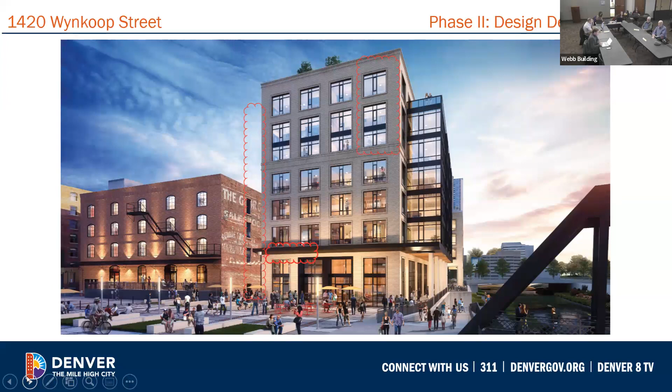So the applicant will be removing parking level number 3 and will be maintaining the parking levels at 1 and 2. Additionally, the applicant is proposing to increase the step back from Wynkoop at the northwest corner. It was previously 15 feet 6 inches and is going to be increased to 28 feet 8 inches. That area is highlighted with the red box. Staff was supportive of this as they felt that it added additional visual relief to 1430 Wynkoop, which is that contributing structure.

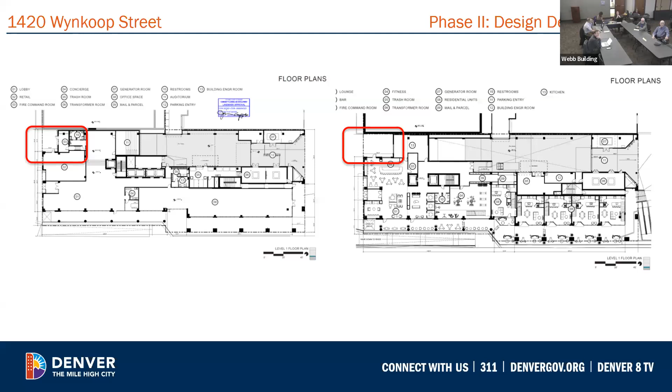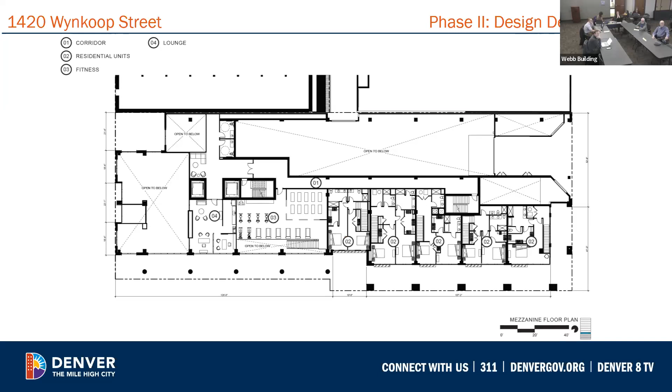So the applicant is proposing to add a mezzanine level between levels 1 and 3, and that will increase the overall number of stories from 8 stories to 9 stories in the previous approval. Beginning at level 3, continuing to level 5, the applicant will be stepping the building back from Wynkoop Street on the northwest corner from 28 feet 8 inches to 51 feet 10 inches. The applicant will inset the north wall of the new structure away from the south wall of 1430 Wynkoop Street 5 feet 2 inches for a length of 36 feet 5 inches.

So this portion right here: the applicant will be increasing the inset on the north wall an additional 5 feet, for a length of 140 feet 9 inches, before stepping back out to a width of 9 feet 11 inches at the northeast corner.

Staff would like to note that the patios shown on the 5th floor of the previous approved plan set have been moved to the 3rd floor.

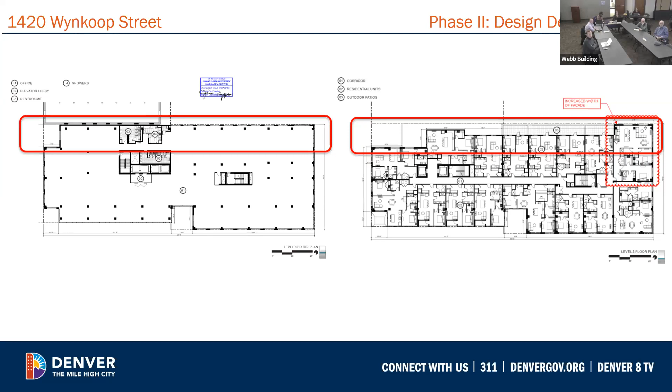Starting at level 6 and continuing to level 5, the applicant will be maintaining the 51 feet 10 inch step back at the northwest corner and the 5 foot 2 inch inset for a length of 36 feet 5 inches on the north wall of the building.

They will be increasing the 10 foot 2 inch step back on the north wall for a length of 140 feet 9 inches, increasing to 177 feet 9 inches at this floor. The 9 foot 11 bump out on the northeast corner of the building will terminate at level 6.

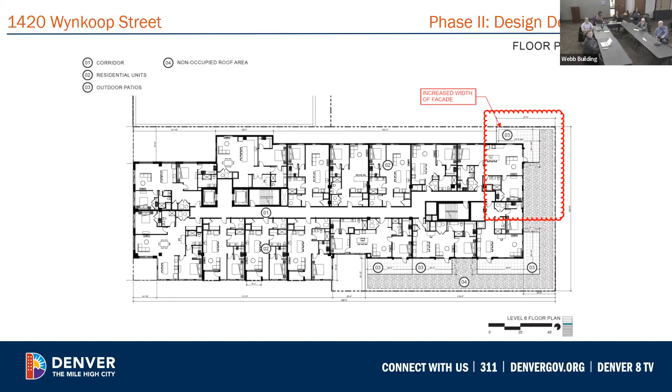Finally, as far as alterations to the footprint go, the applicant is proposing to alter the penthouse portion of the building. In the previous approval, that's level 8, and in the proposed plan set, that's level 9. The west Wynkoop facing wall of the penthouse will be set back from the front wall of the building 26 feet 4 1/4 inches.

The south Cherry Creek facing wall of the penthouse will be set back 15 feet 4 inches, and that will increase to between 15 feet 4 inches and 16 feet 6 inches, measured from the south wall of the building.

The east Wazee facing wall of the penthouse will be set back from the east wall of the building 32 feet 7 7/8 inches.

The north, 1430 Wynkoop Street facing wall of the penthouse will be set back from the north wall of the building 9 feet 2 inches, and between 9 feet 2 inches to 25 feet 6 inches.

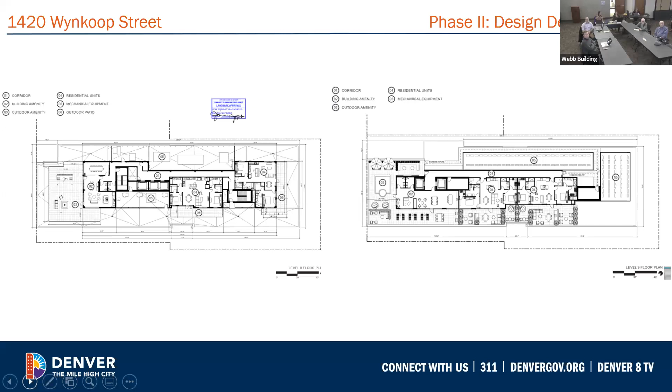The roof deck of the building will wrap the north, west, and south sides of the penthouse, with mechanical equipment on the north and east sides of the penthouse. That will be set back 88 feet from the west Wynkoop wall of the building.

Now we'll move into alterations on elevations. There are just a few minor adjustments to the approved windows at the first floor of the south elevation, added to better accommodate the mezzanine level in the proposed plan set. They will also be adding additional doors at level 1 to provide patio access for the first floor tenants.

The largest change on the south elevation is the addition of Juliet balconies and doors and additional recessed balconies. The applicant will be adding clear glass Juliet balconies and doors to levels 3 through 8 of the southwest corner of the building, and levels 3 through 5 of the southeast corner of the building.

They will be maintaining the overall mullion pattern of these openings from the previous approval, but will be adding doors and clear glass railings instead of just maintaining them as windows.

They are also proposing to add recessed balconies on levels 4 through 7 of the southwest corner of the building, compared to the previous approval of recessed balconies that were just at levels 5 through 6 on that corner.

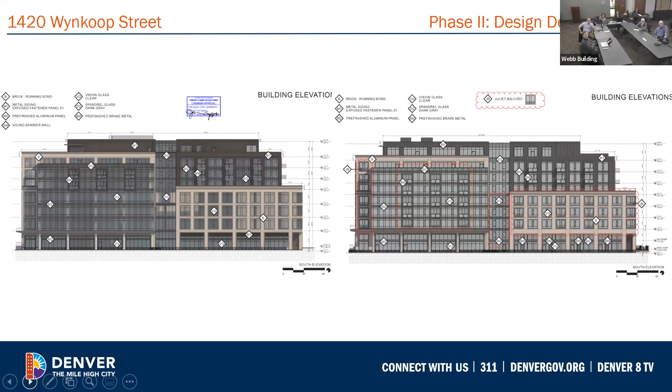So on the east elevation, there are 2 changes proposed. That includes the addition of casement windows on levels 3 through 5, and the addition of Juliet balconies and doors on levels 3 through 5.

The proposed casement window addition will fit within the approved mullion pattern in the previous approval, and will not significantly alter the appearance of the previous approval. The applicant will be adding clear glass Juliet balconies to levels 3 through 5 of the northeast corner of the building, maintaining that overall mullion pattern. They're just adding operable doors and a railing rather than maintaining windows.

So the addition of Juliet balconies and doors to a street-facing facade below 55 feet is slightly concerning to staff. However, this portion of the guidelines is a preference and not a requirement, so we felt some flexibility could be granted here.

I don't know why it decided to stop letting me change the slides.

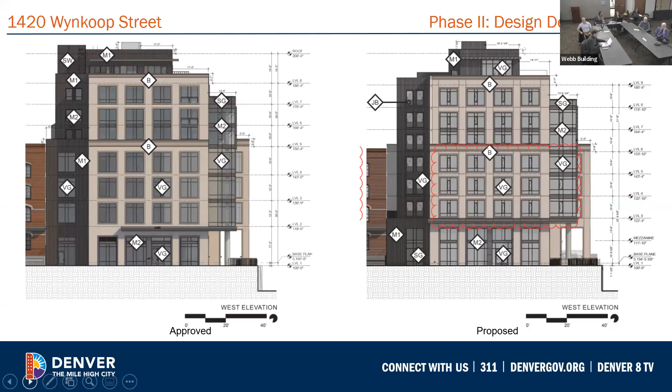So on the west elevation, the applicant is proposing 3 alterations: the addition of casement windows on levels 3 through 8, the addition of Juliet balconies on the metal clad building zipper on levels 3 through 8, and the removal of the first floor entry door on the metal zipper portion of the building.

The casement window addition will fit within the approved mullion pattern and will not significantly alter the appearance of the previous approval. The applicant will be adding clear glass Juliet balconies on levels 3 through 8 on the northwest corner of the building, maintaining that overall mullion pattern as previously stated.

Further back on the building, the Juliet balconies and doors will be added to the setback, which is set back from the street 51 feet 10 inches. Finally, the applicant will be removing the entry door at the first floor of the building on that zipper piece, maintaining the overall mullion pattern from the previous approval, just adding a door at that first floor level.

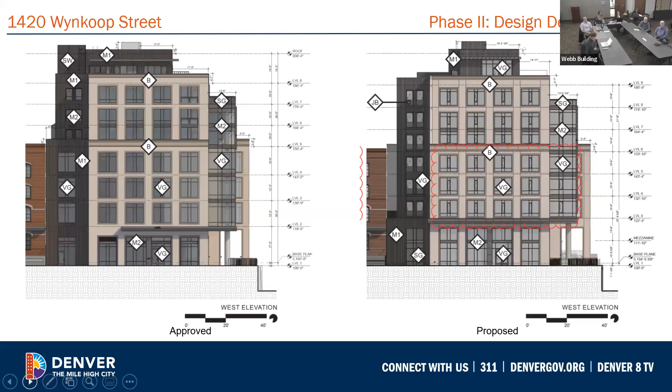On the north elevation, there will be quite a few alterations. The applicant will be stepping back the metal clad building zipper from 28 feet 8 inches to 51 feet 10 inches, adding clear glass Juliet balconies to levels 3 through 8 on the northwest corner of the building, as well as levels 4 through 8 on the main body of the north elevation. The applicant will be maintaining the overall mullion pattern of these openings from the previous approval, and adding clear glass balconies.

The applicant is proposing 3 windows matching the previously approved window configuration on the 36 foot 5-inch bump out. Staff had mild concerns over the solid to void spacing on the bump out, but feel it may be minimally visible as it is more than 51 feet 10 inches from the west wall or west elevation, and it's on an interior side.

An additional alteration to the window openings can be found on the metal panel zipper at the center of the north elevation. Previously, the windows in this location were paired awning and fixed mullioned windows, and now they're proposed to be altered into single punched openings. We had some concerns over this additional window type on this elevation, feeling it might visually disrupt the established window opening rhythms on the building, but also felt this portion of the building would be minimally visible because it is at that interior lot side.

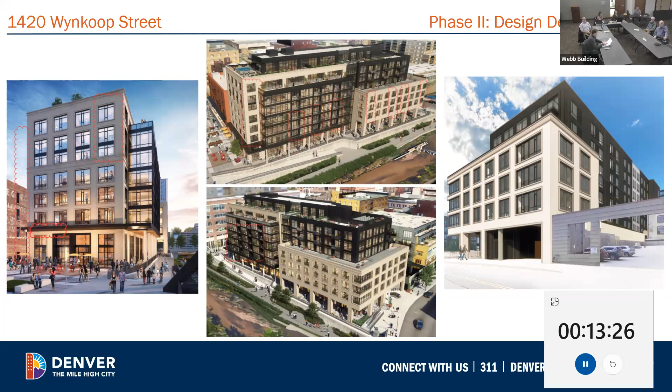I think, as is the theme relative to the original design detail approval, we think this is actually a better response and condition at the corner than was initially approved. We hope you see that just by having that sort of interlock and that element, the masonry element, sort of fly past the upper story setback area.

And we do believe, I believe it was Heather, maybe the last time we spoke, who thought that the plan would benefit by introducing some extra square footage to that unit itself. And I believe, as Mr. Glick commented, the datum at 55 feet is important.

We've gone in and done albeit subtle, but intentional detail to highlight that area throughout the solid metal zone on that north facade, and then changed how the windows are gathered through material texture and pattern on the floors below that datum. So it's more subliminal than literal, of course, not an obvious color change. We thought that was incongruent with the overall composition and would detract from the alley, but we do have a material change, or a pattern change, there.

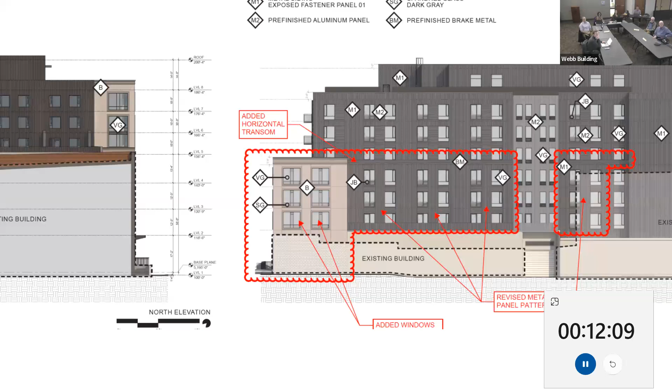So we tried to consider and respond to all the comments we got last month, and hopefully you're seeing that here today. Is that all you have? That's it. Great. Any members of the commission have questions for the applicant?

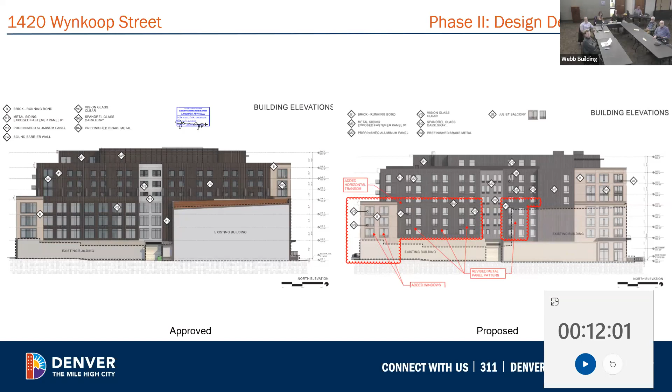Is there anybody from the public wishing to speak on this project? If you were on the Zoom, please raise your hand. The staff can make you a presenter. No hands raised. Okay, we're not seeing any, so we will close the presentations and public comment and open deliberation.

What does everybody think? I wasn't part of the last round review piece, so I don't have that context, but I'm supportive of the changes. Given the primary shift to fully residential and the pattern of windows, the Juliet balconies at low levels, I don't have an issue personally. I think it's a good street activating moment with that lower level activation. I'd commend you on the work it takes to get to a fire rated window assembly and wall like that on a property line, but I do think that extra width and double window pattern helps the proportion of that volume feel better.

So generally, I don't see any issues with what I'm seeing here, and will be supportive of the changes. Jim and Tom can chime in, but I think last month's discussion, the commission was generally comfortable with the modifications. The area of particular concern was that corner where they've added the windows back in. The application that was denied last month had a false brick panel, and we felt it would be quite visible, as you can see from the rendering they've provided. We agreed with the staff recommendation that it was important to get windows back in there.